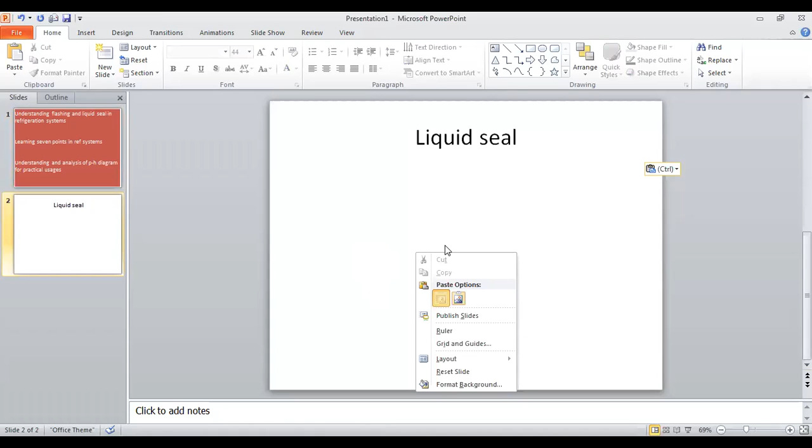Yeah, first we will go with this liquid seal. What this liquid seal means in refrigeration systems. Okay. So let me take a restricted flow passage. Okay. This is a restricted flow passage. Flow passage with a restriction. Or we can call this a kind of metering. Okay. Or metering. It is not about control at the moment, but this is restriction and metering means limiting the flow. Okay, limit.

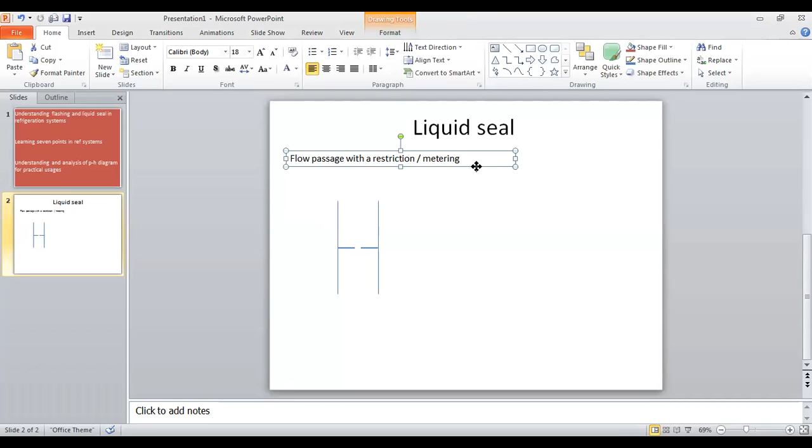Yeah, we have a little bit of signal issues. I'm using now mobile and also the telecom, two lines for Wi-Fi. So if one is interrupted, I'm using the other.

So flow passage with the restriction or metering. Okay, and let's say there is a certain flow trying to pass through this. So I would say it's a liquid. Okay. Coming in, occupying the full space. Certain flow trying to pass through this. And it really has something like a great push towards down. Okay. So as a result, somehow the flow goes out. Flow goes out.

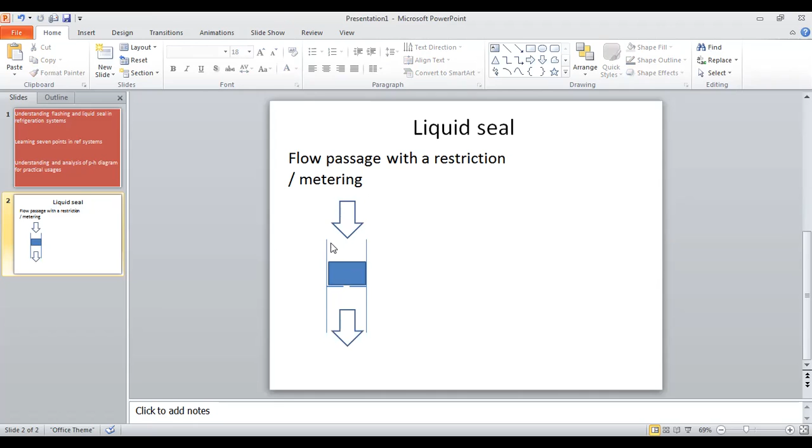So you know that flow comes with the wider area, and let's say this is all in liquid form. So what happens is when this flow passes through this, it is natural to have, we would say, a bigger pressure drop. You need a high pressure to pass this liquid down through the restriction. So there is a pressure drop for sure. Because it needs a huge force here. After that, it's not necessary to have that force to push through this, unless there is a restriction.

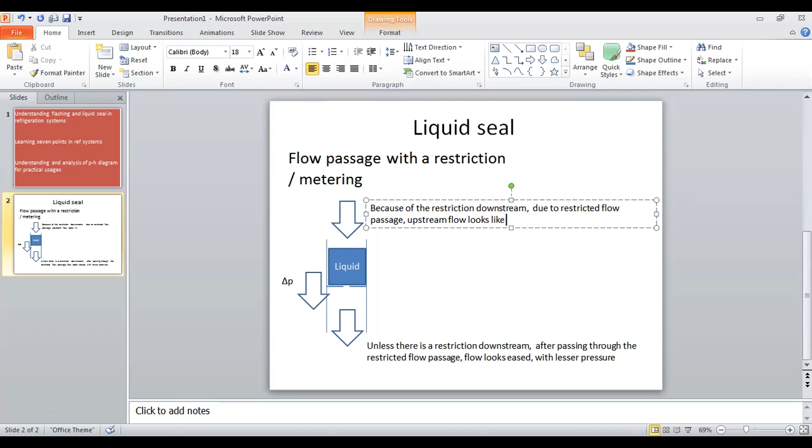Okay, but the other way here, because of the restriction downstream, due to the restricted flow passage, upstream flow looks like pressurized. Okay, so you don't need formulas for this, but you need very common sense, practical understanding. That is how nature works.

Okay, as a result, there is a pressure drop across the flow restriction. And this dropping of pressure takes almost no time. Okay, takes almost no time.

So then what happens? Then the phenomenon of flashing takes place. Okay, so I add here a special word, liquid. That is very important. So then this liquid seal is very important.

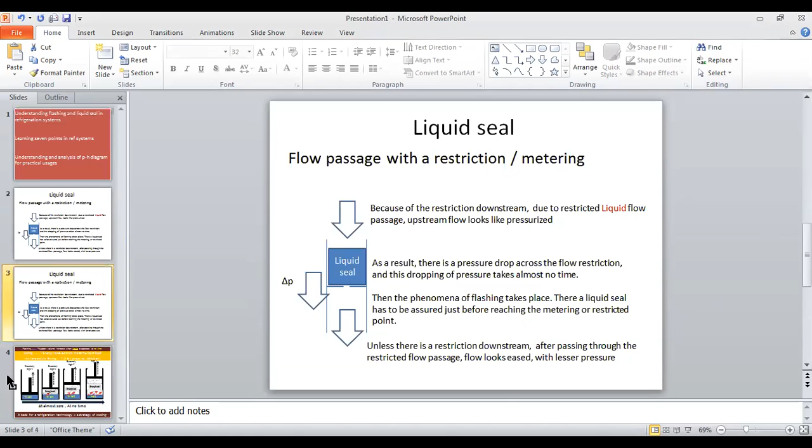Quite nice. So let me bring some recollections from the previous slide of your general understanding about flashing. This is a previous slide. I hope you can remember this slide. So I will combine one slide considering these two cases. So how to get the space anyway? No big deal. I will take a snapshot of this.

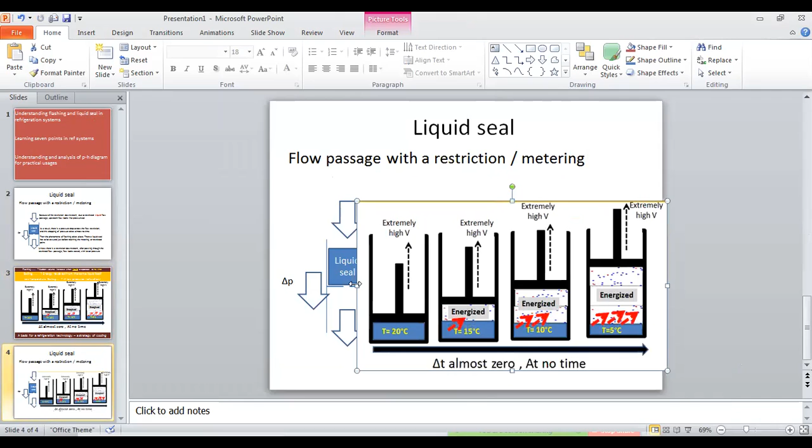So I want you to see more than similarity, something like exactness. The same thing is taking place. See, temperature dropping is taking place. And if I need to add something to make it a little complete, there's a portion of gas and there is a bigger portion of liquid.

So no more talking about liquid seals, okay? Liquid and some presence of gas within liquid. So by right, this should be in some bubble-like things. Now make it further small. Yes, something like this. Yeah, that may be too much. Okay, more liquid, but there is a formation of vapor.

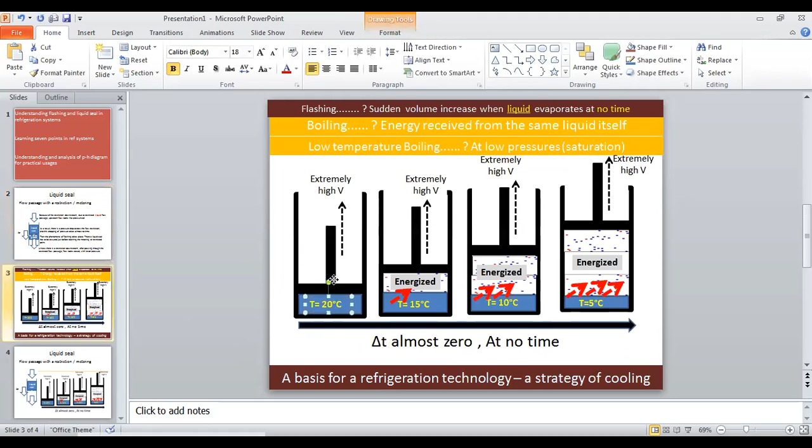Okay, then from the previous one, let's see, I will take this 20 degrees here, and I will take this 5 degrees.

Yes, exactly the same. Okay, exactly the same. Good. So I have to bring the same to the previous slide.

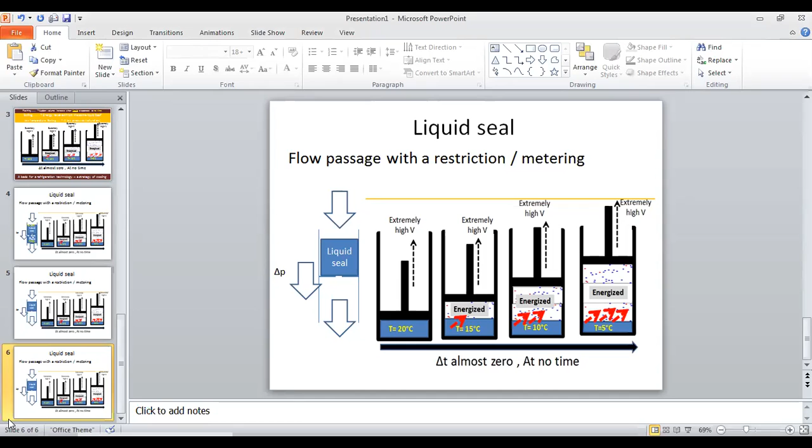Evacuating the gases. Evacuating the vapor form during the flashing. Okay, so repeated evacuation, continuous evacuation is important.

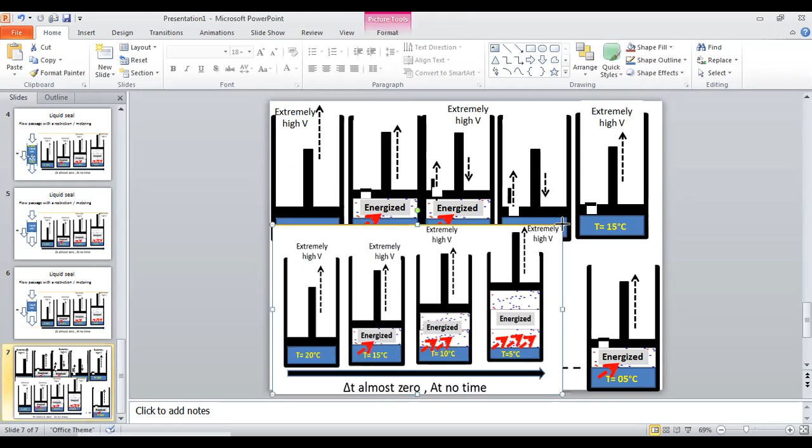This one we are incorporating with this. We are incorporating this evacuation technique because otherwise there will be limitation of performing continuous generation of cold, or continuous removal of heat, in other words. So we are incorporating this with this solution.

We are incorporating the solution with this basics. So here also for this case, we have to incorporate the same. We have to incorporate the same. So let me take a copy of this slide.

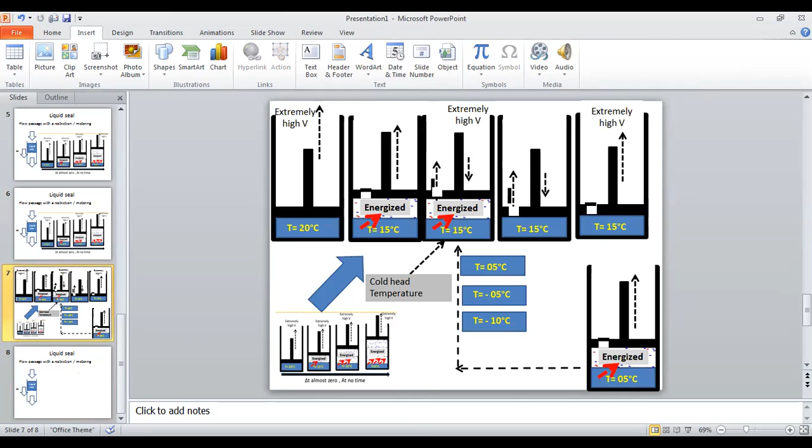Okay, so how to incorporate this? Which means we have to evacuate the gases. Hope you have some memory of this. So we have to incorporate this.

We have to incorporate this. Yes. We need to have this. Okay, we need to have this. Then we can have some continuation. So how we are going to have this is here.

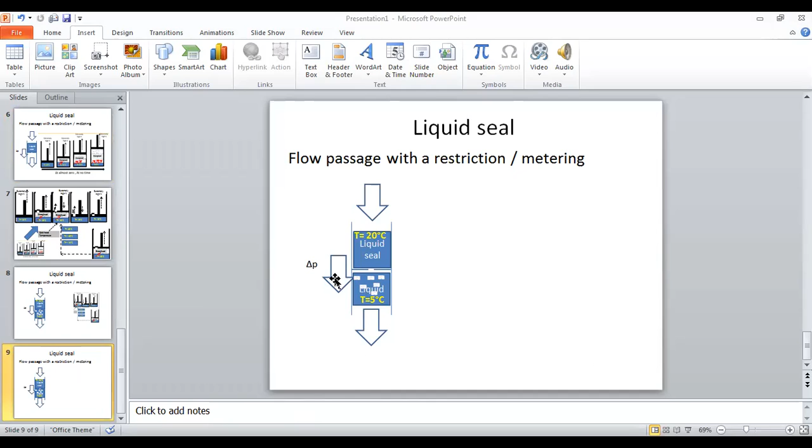First we have to take the vapor, and of course this liquid, we have to let this move through the pipe for loading. We have to move the flow through the pipe for loading. It's moving here, for loading. We have little color differences.

Previous color looks the same, but anyway, it's okay. Loading. So then the loading will take place. Loading will be taken place, like this.

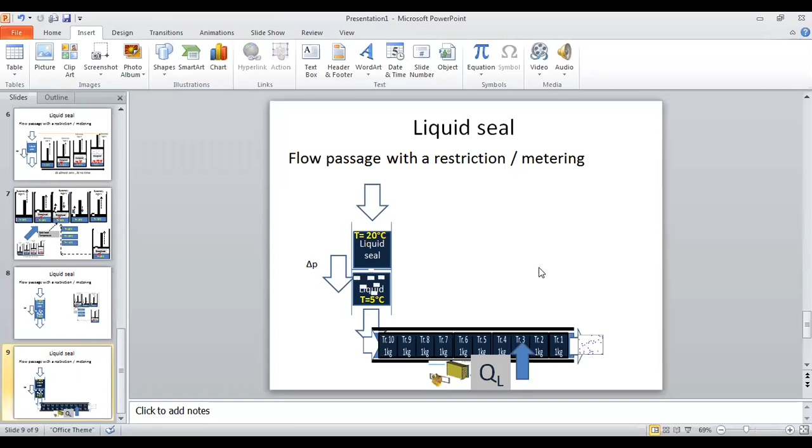Okay, once fully loaded, this kind of small bubbles of gases becomes bigger ones. And here, the leaving is full of gas, all evaporated after energizing. So we have shared this with you.

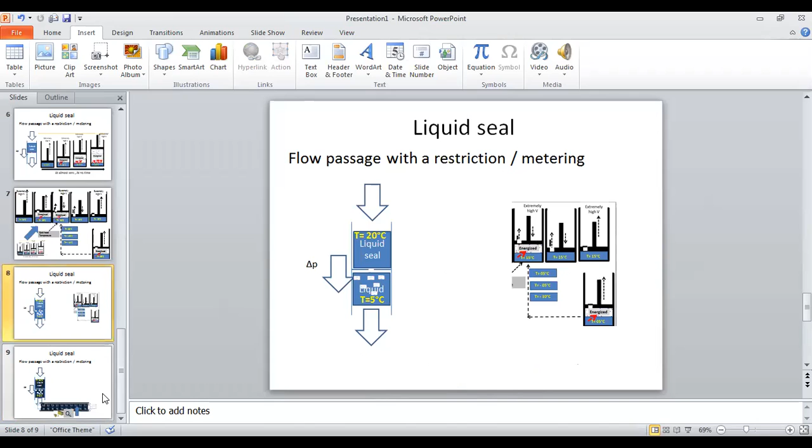Then we need to take this and evacuate the same way. That's what we call incorporating this solution. So we have to look into the strategy.

So we are going for sucking this. I will take a simple one, give me a second. So we will take this and we will dispatch this. Transport received in gas form and dispatch again. Of course, this energy for the system is provided by this dispatching point.

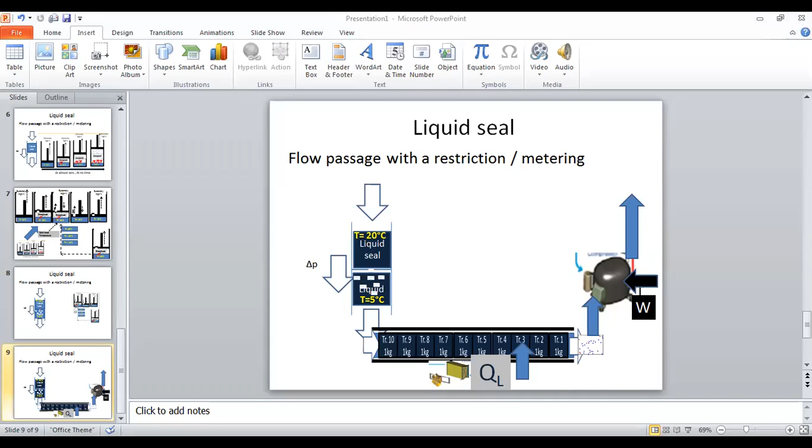Interesting. So after dispatching, it's going for unloading. This is the flow, I just put the flow as some parcels, flow packets. Okay, this goes for unloading. Interesting, okay, going for unloading.

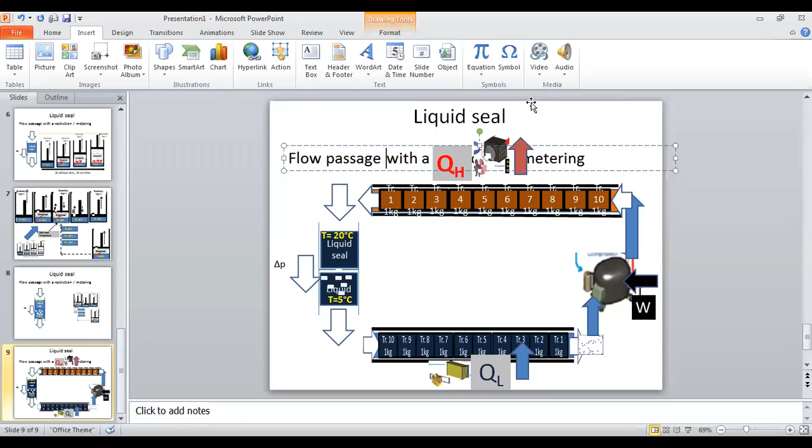You will see how the unloading is taken place. Of course, for here you have to have a component supporting this transport phenomena, for unloading. I think liquid seal is now relevant as a topic, but this is the beginning of this point. So the condenser is here.

Somehow you can see, because of these two components, one is restricting, but the other one provides the power, the energy for the system to move. So combining this, dispatching device and the restricting device, as a result there can be pressure drops. And because of the pressure drop, there can be high pressure and low pressure, two sides.

Something like here, like this. A high pressure side and a low pressure side. Okay, high pressure side and a low pressure side. So this is what I need to explain. And I think you all know that

at the unloading, this component is actually a long pipe with some fins, or it's a long space, a space for a flow passage. Loading also, it's a space for a flow passage. Okay, so this is quite okay, I believe this is quite okay for me.

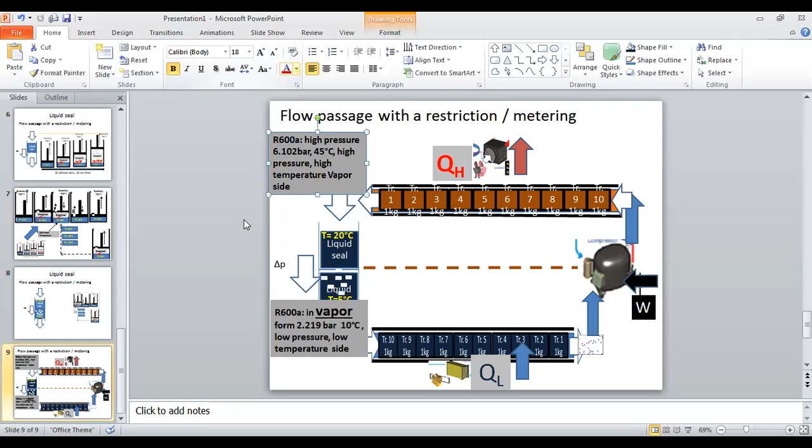Okay, and if you think further, let's say for air conditioning like applications, if you think of R600A, so loading and unloading, there should be corresponding pressures. Unloading, let's say ambient should be around 30, so you may have something like 45-degree flow of transport. For 45 degrees, this should be around 6 bar, because it's saturated form, liquid and vapor remains together.

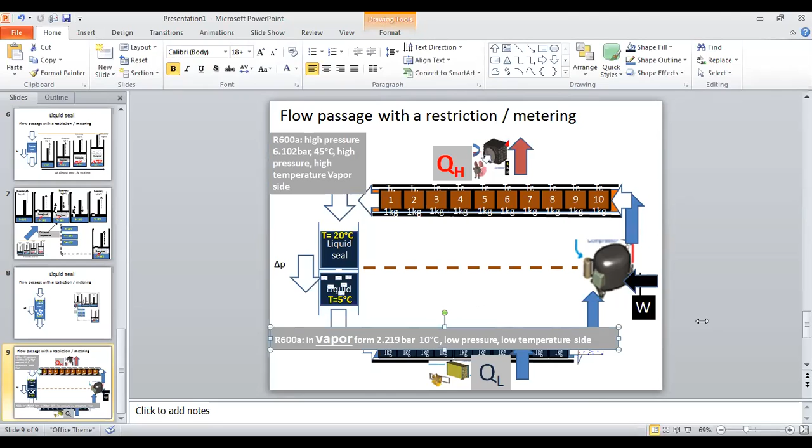Okay, for aircon, for the space, when you are placing this inside the room, this is maybe around 10 degrees C, and pressure is around 2.219 bar. So let me try to make it, I'll try to put it here. Should be okay.

This is the one. Should be okay. Okay, so there is a pressure drop. See here, from 6 bar to 2 bar. There is a delta P pressure here.

Delta P is 6 minus 2. 6.1 to 2.2 means it is almost 3.9 bar. You may know that it's a huge pressure drop. Not to say huge, but it is a sizable pressure drop. It's a sizable pressure drop taken place.

This pressure drop occurs within the system because of this metering device. So you have a P high pressure and there is a P low pressure. Let's see if that is the situation, your high pressure and low pressure sides.

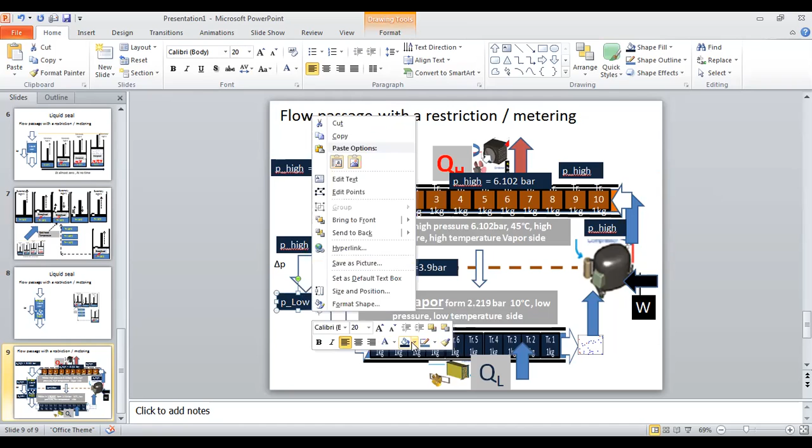Then here becomes P low. P low, P high, P high, P high. Okay, this P low, here also should be the same P low generally, otherwise there can be some performance issues. So you have the P low throughout.

Okay, this is again P high. So you have P high and P low, two sides, because of these two key components, one is metering, one is dispatching. So when it strikes a balance between these two, there is a pressure drop.

But you have to assure there is a liquid seal. Till the liquid seal formation, until the liquid seal is there, the performance of this system is not there because there's no flashing effect. That's why when you start a cooling system, it takes a little time to feel cold, at least a little time to start cooling. The reason is this liquid seal formation. That is very important.

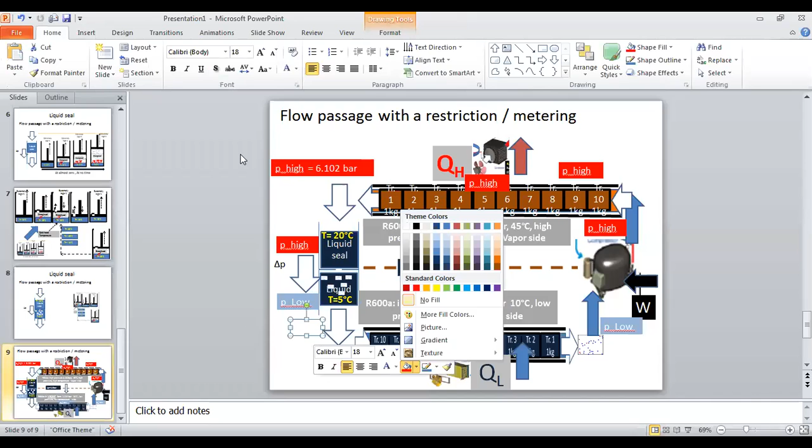Before that, let me number some specific points here. 1, 2, 3, 4.

1, I put here 1. I put 2 here. Let me put 3 here. Let me put 4 here. So you can see 4 specific points here.

And I think I should go for a new slide. And I will take 1 kg now. 1 kg transport, 1 kg transport. So there are 1 kg packets, so many. Okay, so energy levels.

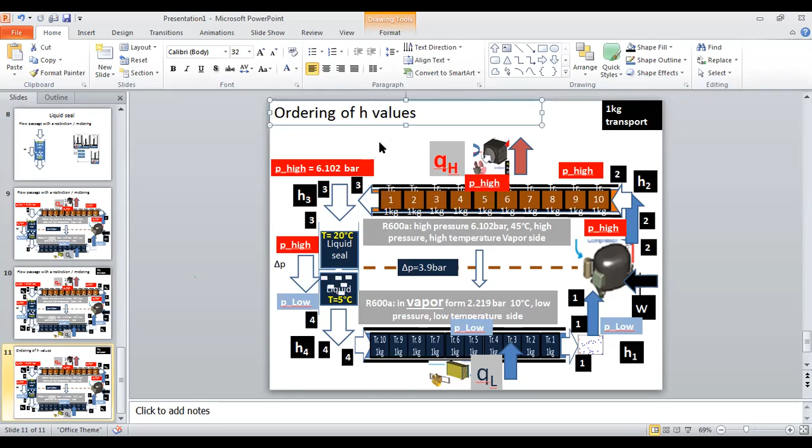High pressures, low pressures. We are explaining this in numerous ways. So what's the ordering of H values? H means energy values at different points. Which one is the smallest, which one is the biggest?

After loading, the energy level should be high. Before loading you have a little less energy. After loading, more energized, dispatching with more power, some more energy in the transport. But after unloading, this energy level is the same as before loading, because unloading means the energy level should be the same as before loading. So if you order this, it is something like this. I think you can practically agree on this ordering of H values.

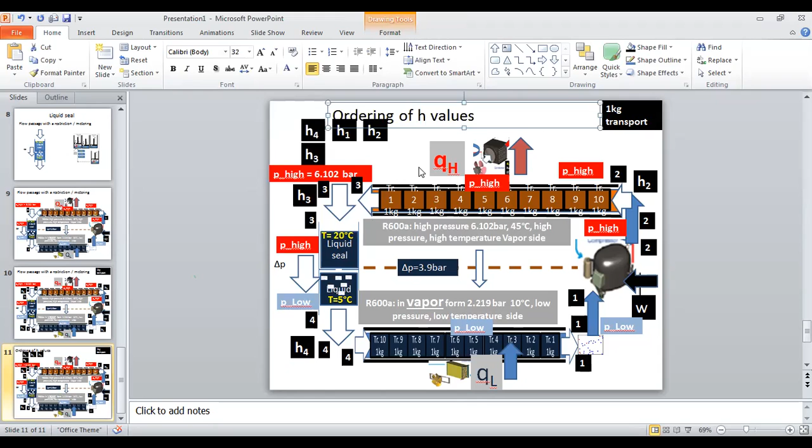Are you okay? Ordering H values is in this way. So if you need further: H1, okay, this is the order. H1 belongs to low pressure, H1 at P low.

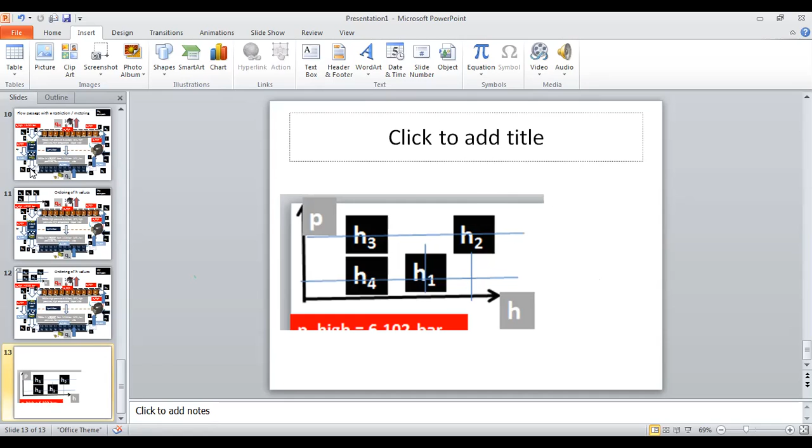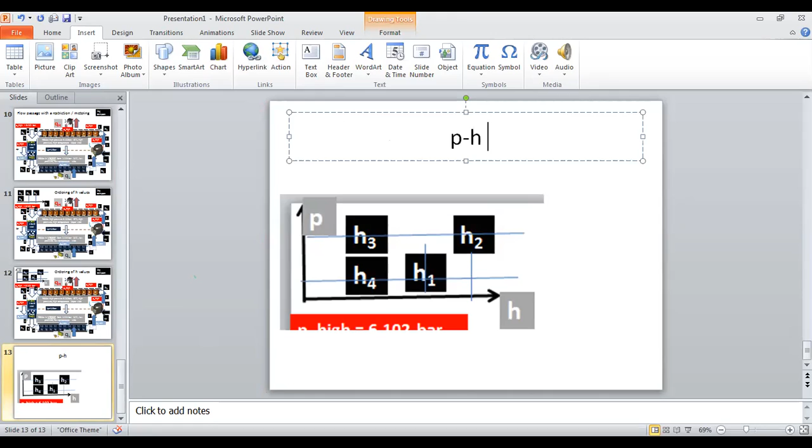Okay, this is the one. So this is our basic p-h diagram, because under this topic I have covered the liquid seal and development of this. Now, the p-h diagram for practical usage and also for understanding and learning these 7 points, so we are on that now. That is p-h. We got some lead for this, understanding p-h. So you know that H3 is a liquid seal.

H3 is a liquid seal.

You all look very silent. Can you hear at least? Yes sir, you can. Yes sir, we can hear. Okay, good.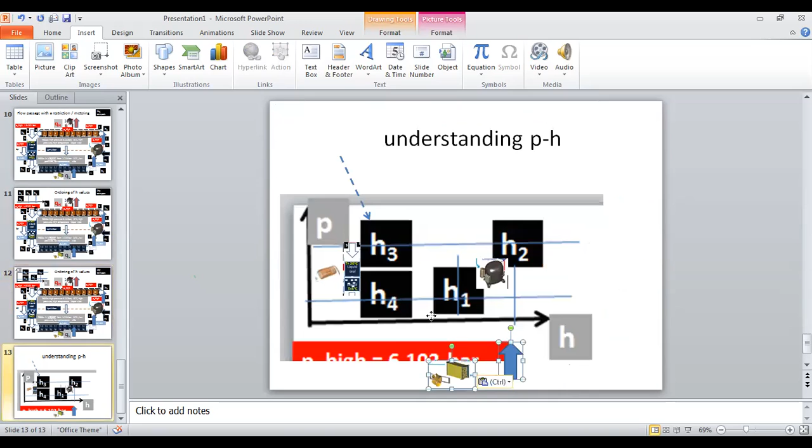H4 to H1, so this piece is responsible. I think it's a bit, not to say complicated, but it's not that well arranged, but it's okay.

Put this way through this. This is the receiver. W, QH and QL.

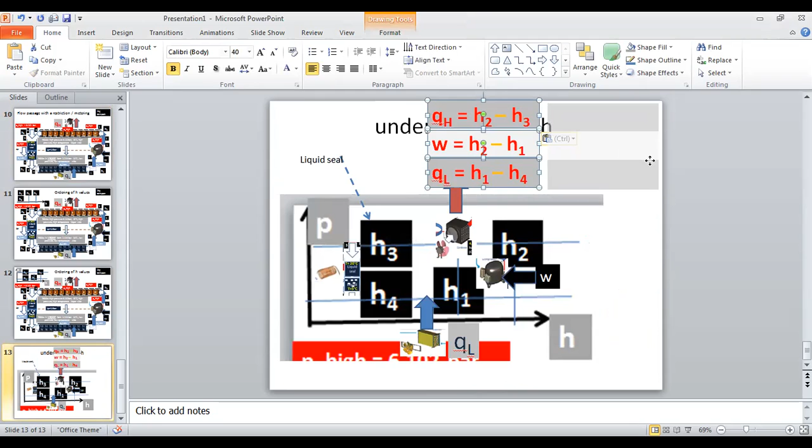Okay, this is energy balance. QH, not that clear maybe. This is better. QH is H2 minus H3, because H2 energy level after releasing QH becomes H3 energy level. So QH is what is lost from H2 and becomes H3. So the difference H2 minus H3 is QH for this case. Same way H1 with the receiving of W becomes H2. So the difference between H2 and H1 is W.

So always when you refer to a component, for example here the condenser unloading, it's leaving end enthalpy minus inlet or receiving end enthalpy. That should be the way, but here as we put the QH direction this way, we are putting in and out considering the practical points, okay?

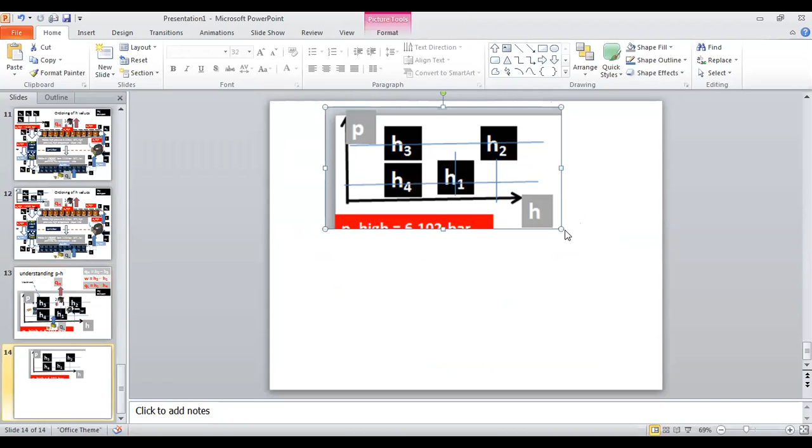So now I'm going to redraw this. p-h, the same way. Now you have this. p-h. So let me draw this in a little better way. Even though the components are not the same, you should know that the corresponding components are there. Let me draw this. How to draw? Maybe 2 axes I will take. And I will draw. It is something quite similar.

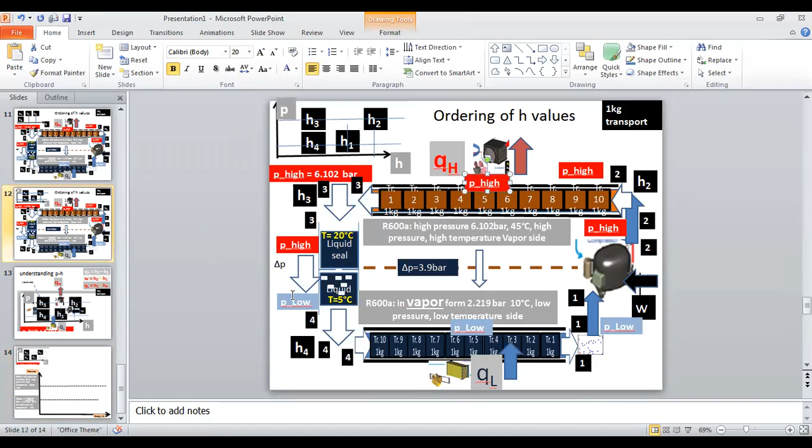Same way, okay? Pressure levels for 10 degrees Celsius and 45. You have high pressure and low pressure, P high and P low. P low here, P high here. P high and P low. And your H1, H2, H3 and H4.

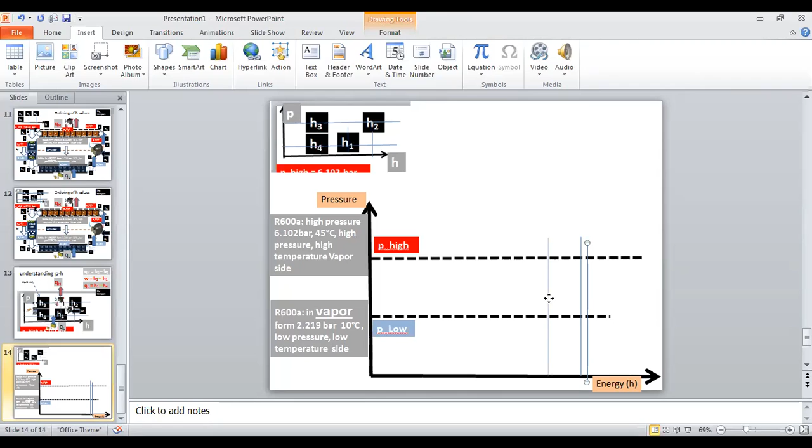Okay, let me construct it. H4, let's say this is the H4 level. Looks straight. H2 level, put it here. H4 level, I put it here. Then H3 and H4, same level here. So let me bring 1, 2, 3, 4.

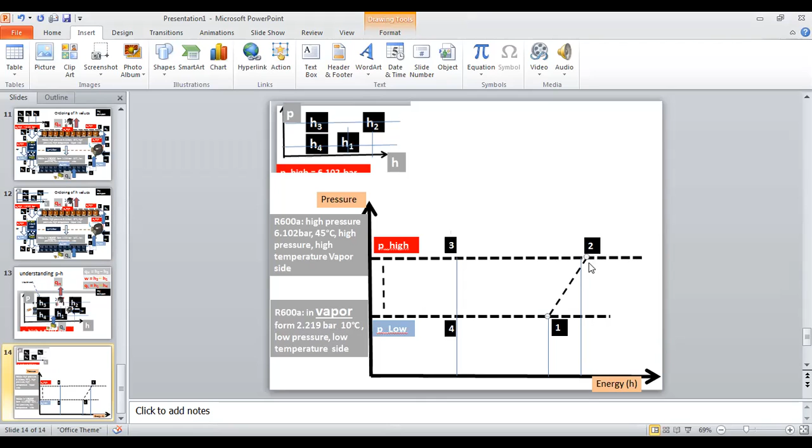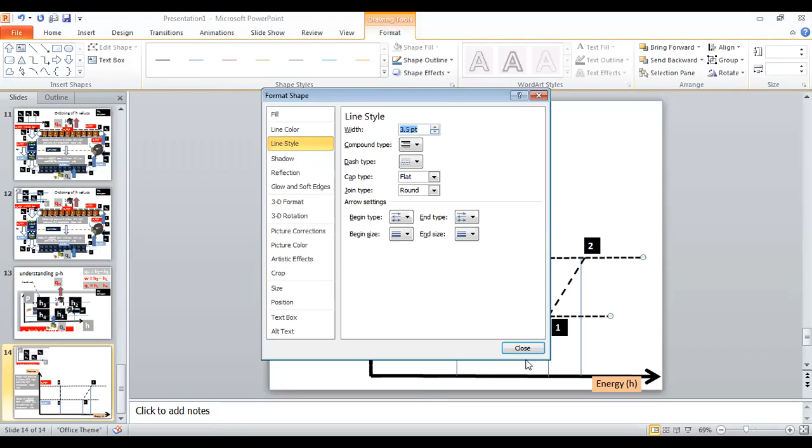One, 2, 3, 4. It's the same. I want to draw it a bit better way. That's why I did it. One to 2. 3 and 4. These two lines, maybe I will change the colors, maybe size. Good.

So all the considerations, we have reasons. Nothing came down from a parachute. When one line is going off, I'm switching to the other. That's why. So I think this is quite nice. So let me add something here.

3 is the saturated liquid point. 4, after flashing, is for sure liquid and vapor together. Of course, more liquid, less vapor. 1 by right should be 100% vapor, because for the transport, it should be fully loaded, meaning it's vapor.

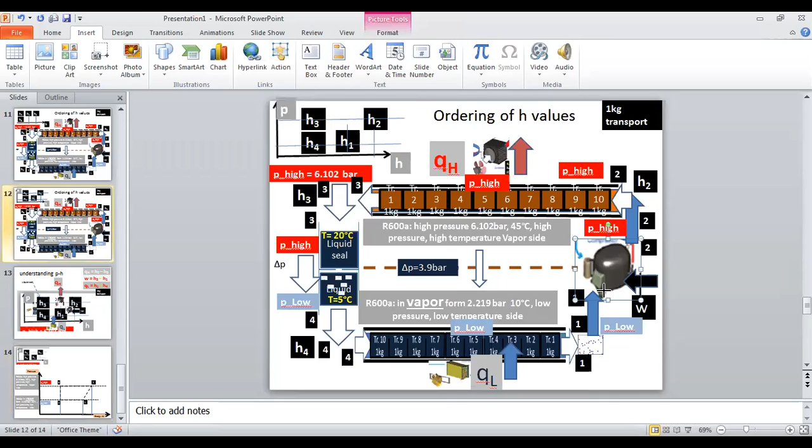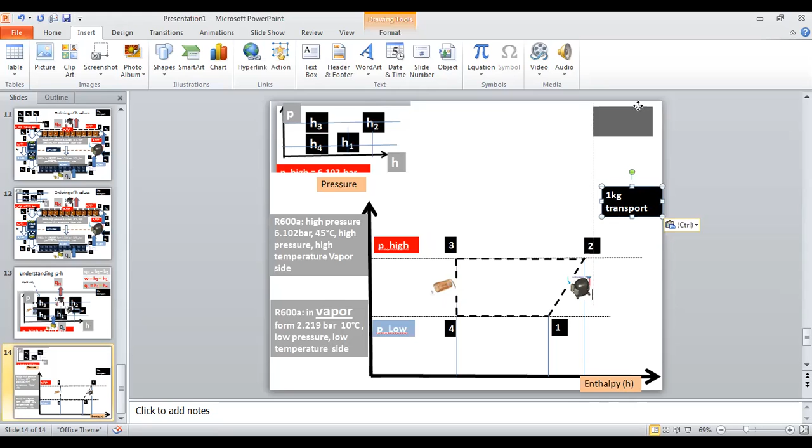This is the pressure axis. This is the energy axis, H. So I will put it as enthalpy, H. As usual, remember, this is for 1 kg transport, meaning specific enthalpy. So this pH may be better for you compared to the previous. So I will group this: 1, 2, 3, 4. Okay, good.

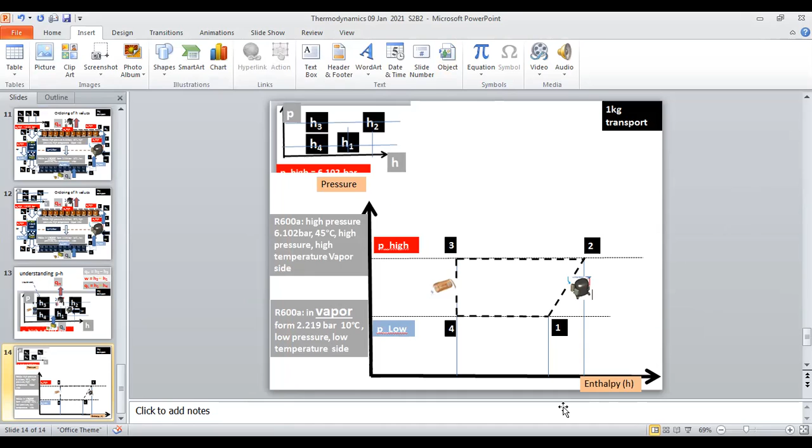Let me save this. 9 January 2021. S2B2. Yes. Okay. Now I'm going to share the screen with you. I have a reason.

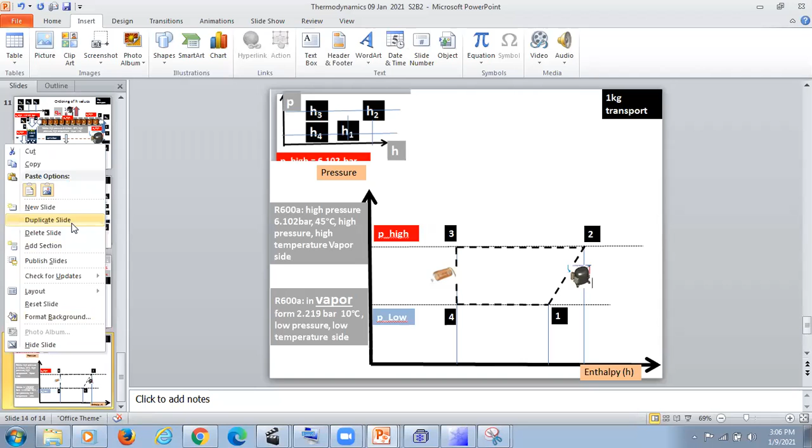New slide. I paste this. Too big. Okay. So in our application, we have to take this first. And then we have to outline the pressures, high and low pressures afterward. So these are the pressure lines. You cannot see it, so I will make it. Yes, now you can see.

Line style. Let me make it continuous. Okay, so this is the high pressure line. Of course, I'm not referring the exact values. And the low pressure lines. No idea, but I just put here. I'm not referring the exact values.

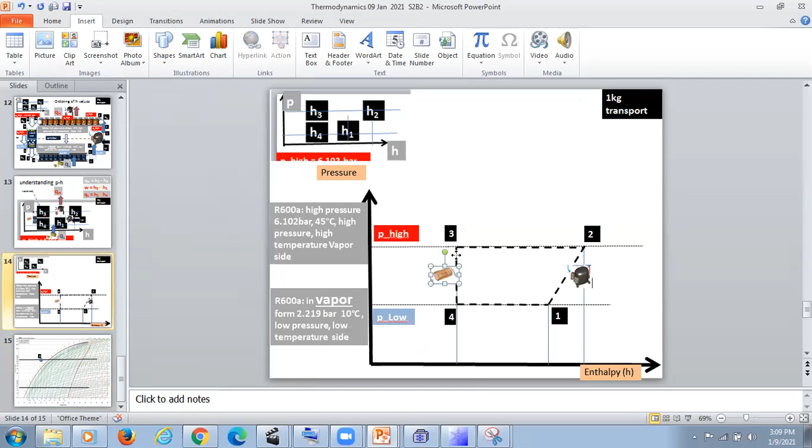Okay. So let me mark the point 3. Because in a design, we have to assure the liquid state. Let's say here it is point 3. This is point 3. Okay. And straight down here. Okay. Three and 4, as you remember. This one. Okay. So remember this.

I'm drawing this. Okay. So your point 4 will be here. Then after all becoming vapor, your point 1, because we cannot guarantee this is only 100% saturated, so there can be a little extra superheat. So let's say 1 is here. I just put 1 here. Okay, 1. Even 1 is a point we should define.

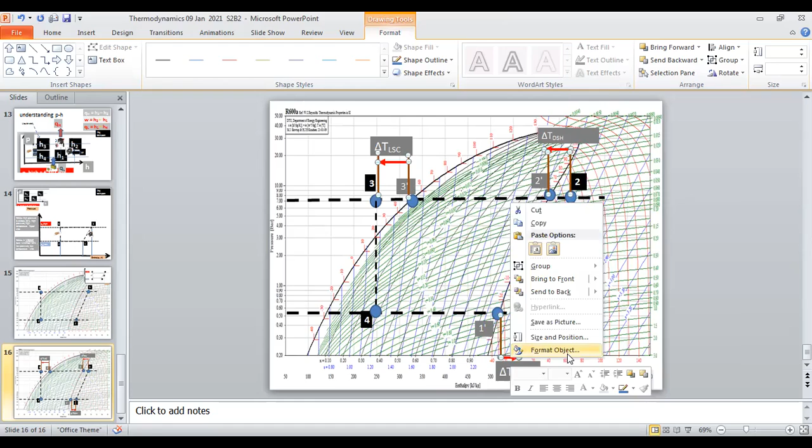At least to say it more prominently. Good. So these are the 7 points. And I believe you have some understanding about these 7 points.

Any questions before going for the next section? Any questions? Do you understand this? Very good. Yes, sir. Thank you. Very good. So let me continue this. So I'm going to share the screen with you.

Screen, I have a purpose for that. So this is the graph, p-h graph, and I'm going to draw a cycle. There you will understand the rest. So let's say this is a cycle named R600a. So these are very practical purposes, R600a. Understanding transport, I just put in refrigeration.

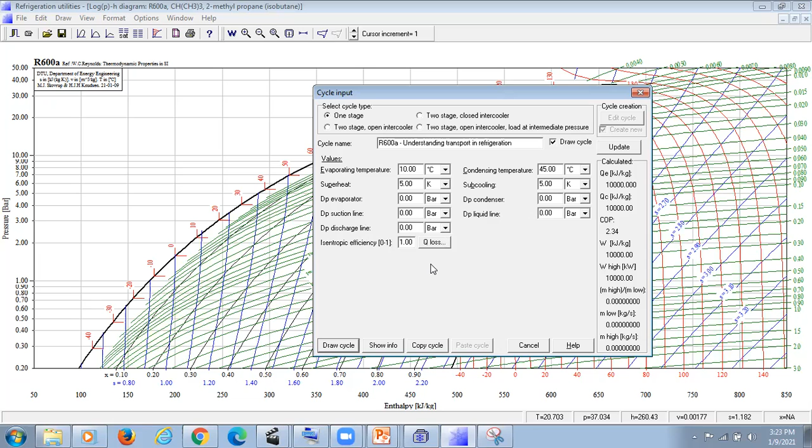Pressure drop evaporator Dp, I make it 0 because it has no limitation or no restriction for the fluid. Because if restrictions, there should be flashing in the evaporators. So all the pressure drops are 0. Efficiency of the compression, isentropic efficiency, I have shared with you, I put it as 1. So these are the conditions.

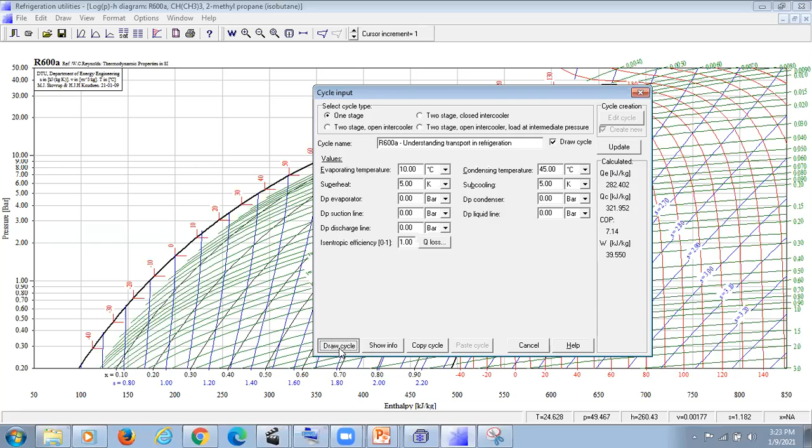So I'm going to copy this and I will put into your notes here as this: design consideration for cycles inputs. So after cycle analysis, you are going for the component developments. So back to this. So now I click update and I ask to draw the cycle. See, this one exactly like what we have done. So I'm going to copy entire, maybe here.

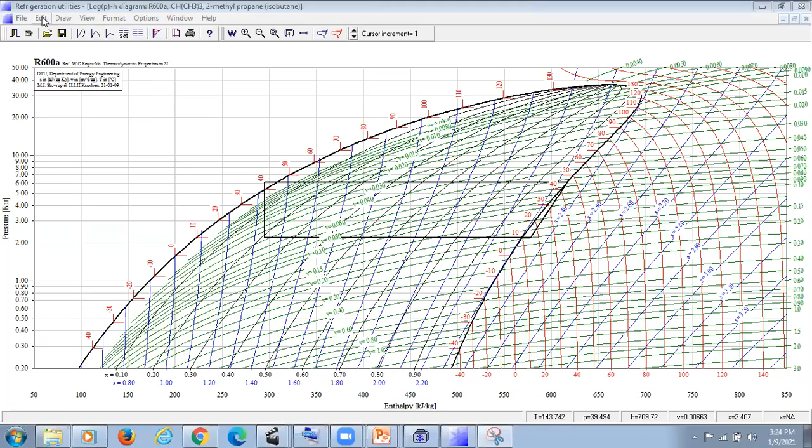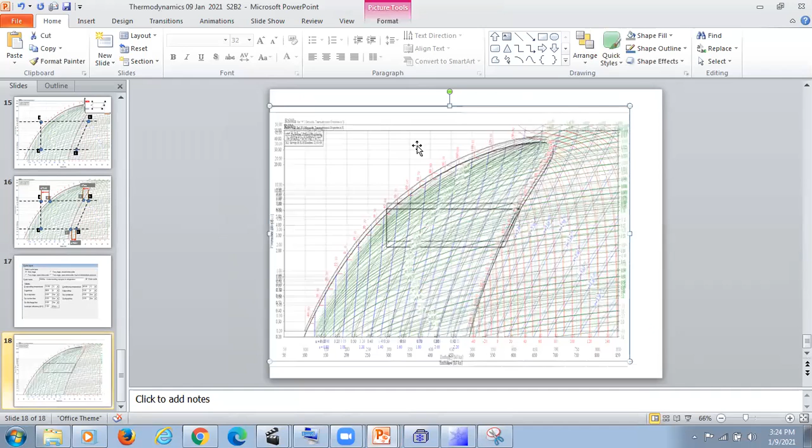That's why I would say we are learning something professional. Yeah. I hope you can see the cycle. So here, whatever we draw here, also let me take that. I just take a snapshot of this. May I take the complete one?

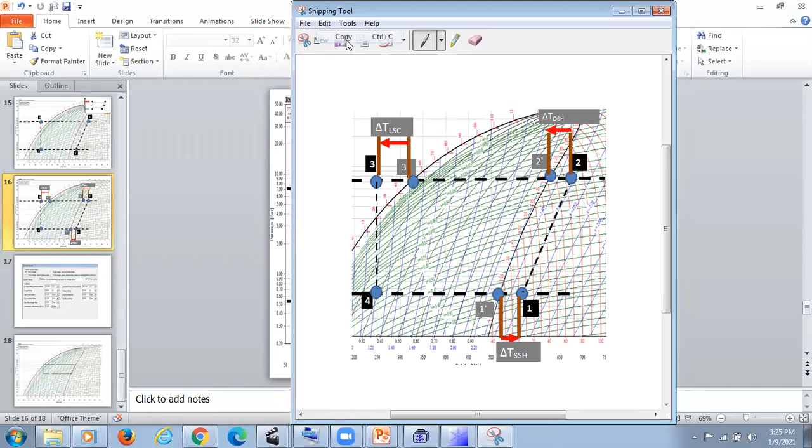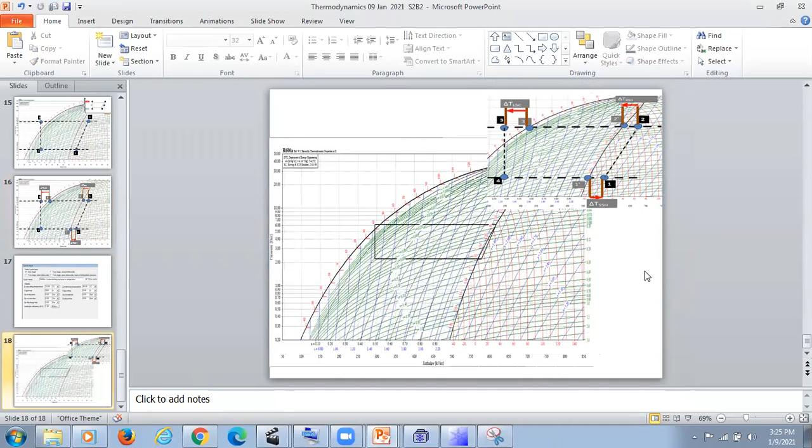See, it is quite similar. Okay, so you can feel it better. So this is basic the things you have to have when you do this analysis. So this is quite similar. So we have to do the analysis as well, but before analysis, I have to mention something for you.

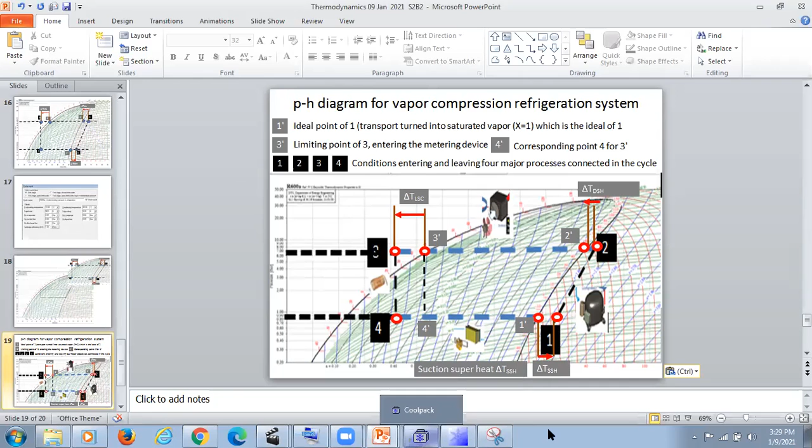3 dash point is the limiting point of 3. This is the number 3 point. Limiting point of 3, entering the metering device. For 3 dash corresponding is 4 dash. But for actual 3, it's 4 after leaving the metering device. So you know that 1, 2, 3, 4 are conditions entering and leaving major processes connected in the cycle. So this is how we should consider the 7 points. I believe you can understand this. So this is considered the master slide, and hope you can look into this.

Not finished yet, but it is 3:30. Any chance to get extra 5-10 minutes for us to complete this? Any chance to get, Putta? Because here we draw the cycle, we draw the curve. This is the one, and we have to get the corresponding data. Yes, we can do. Okay, very good.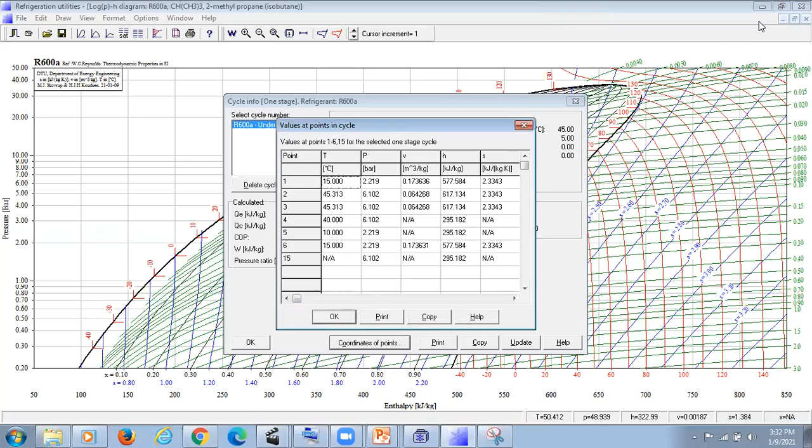And we have to get the coordinate points, the values of the points. This is the one. Values. Go for the screen maybe. Yes, values. So I have to get the values also copied. These are the values. Give me a second to analyze this. You have to do the same afterward.

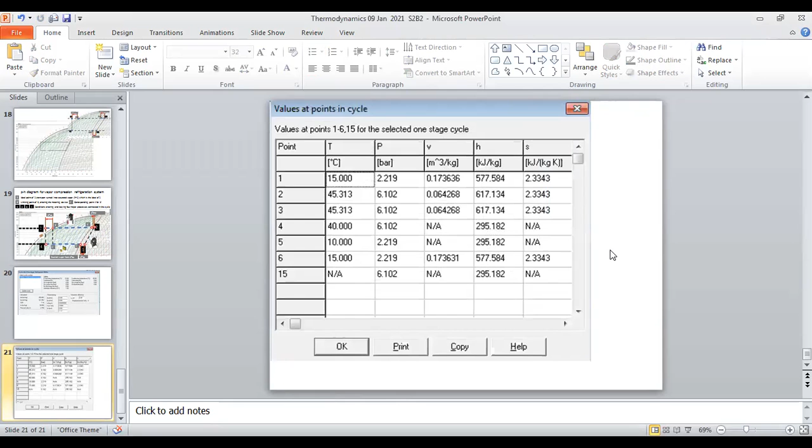Good. Okay, so these are the points. So we will look into the curve now, the curve 1, 2, 3, 4, and all.

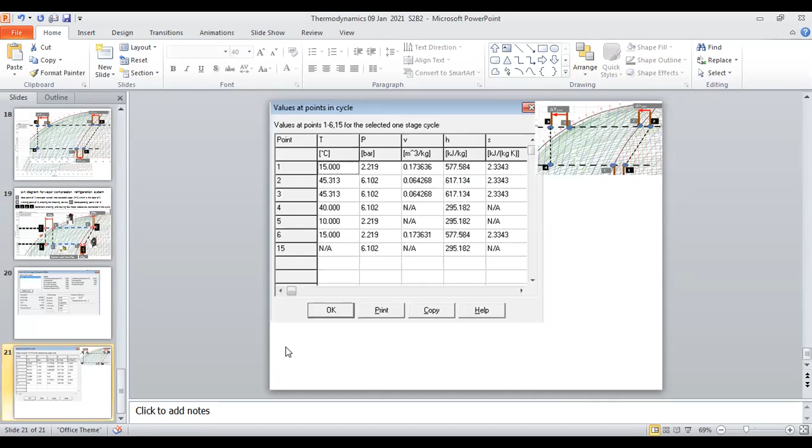Okay. I hope you can remember the expressions we got here. So I will do the analysis based on this, because these have some practical relevances. So now I'm going to calculate QH.

QH is QC in these results. Okay, QH is QC. QH is unloading. So unloading is H2 minus H3 in our case. So here we have to look for the values. H2, of course, should be the highest H value, so the highest here with the highest pressures.

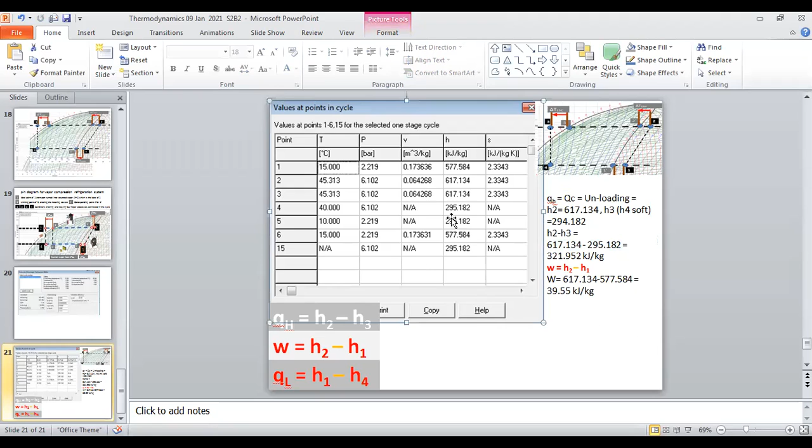So W is H2 minus H1. H2 is the same. Sir, excuse me, sir, 295. Can you share the screen? Okay, it's 295. See, this is 295. It's above. Okay, this is H3 295, is 294? No, here for this case, you can see from the data, this is 295. I'm taking from the data, this table. Sir, H4 software. Yeah, H4 in the software.

H4 software, 294 is there? Where is 294? It is 295.182. H2 equals 617.134. Sorry, 295.182. Okay, thank you. So that is H3, H4 in the software. So here 295.182. So you have a value, right? So H2 minus H1, it's the same, 617 minus 577 with decimal.

Now you see COP, or even the QE, evaporator. I have to make it a little bit bigger. QE, loading. So loading is H1 minus H4 for our case. H4 in the software is H5. So 577 minus 295, this is 282. So what I want to show you is, you have this data: QE value, W and QC. All for 1 kg, per kg transport.

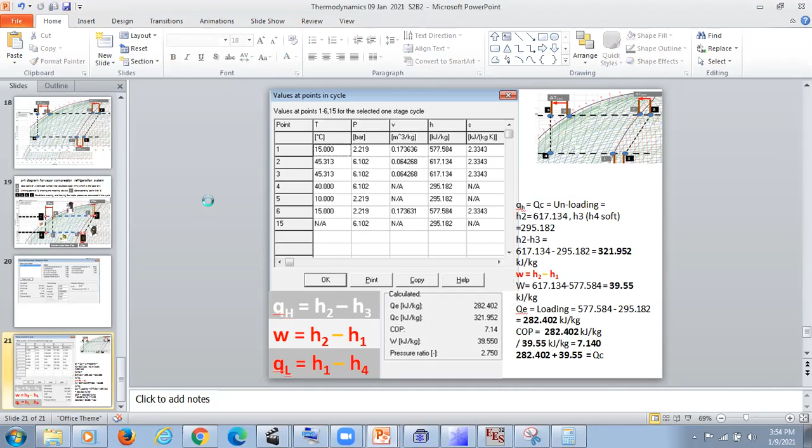So here, if you look into this, we have done today understanding flashing and liquid seal. We have done understanding and analysis of p-h diagrams for practical usages. We have done that as well. So we can do some analysis also afterward. Then next session we have to start how to look into the TS diagrams. So immediately after that, refrigeration system analysis we can do at very reasonable practical levels, and later for steam power plants it's a matter of only 1 day, because this kind of cycle you have already learned. Okay, so the balance is very simple.

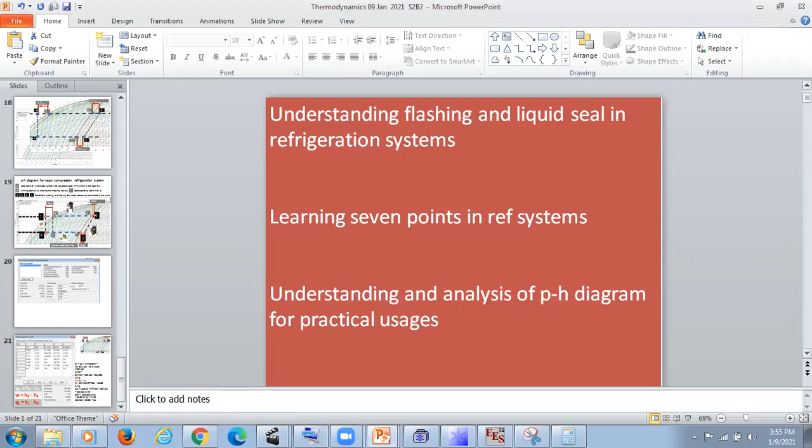If you can really understand this to the fullest, beyond that, it is really a remarkable achievement. That's why I share this in this way, so that there is nothing to memorize, nothing to forget. You know something naturally, because it's a natural understanding with some data and analysis. So it's a blend of the practical and the theory and imagination and all, and it's for us to move forward afterward. And especially I have shared with you flashing, a very important phenomenon. So our timing is limited.

If not, I can share more with you, but at this point of time, we will be content with this sharing. So next week we will be learning TS and some analysis, and we will go for power plants. Okay, very good. Then I will send you an assignment about heat pipes. I have not sent it yet. That is outside this, but in your notes you can see the heat pipes, because we have to see something practical out of you, really. We have to see something practical out of you.